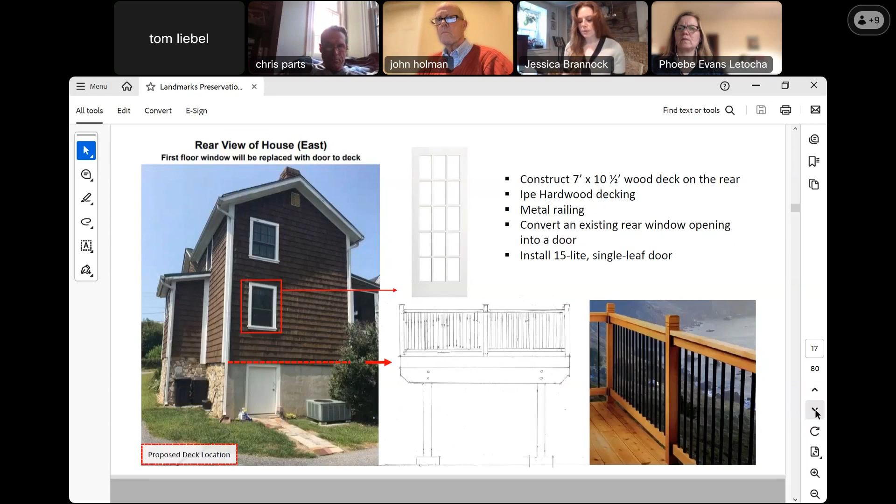Next we have the Hart property at 410 Fairmont Avenue in Towson, County Council District 6. This is final landmarks number 235, the Parker House, which was relocated from its original location in 2015. The applicants have proposed the construction of a rear 7 by 10.5 deck and to alter the existing rear window opening to convert it to a door, citing Baltimore County Historic Preservation Guidelines Chapter 2, Windows and Doors, and Chapter 7, Fences and Landscapes, County Code Section 32-7-405.

And lastly we have the Wheaton property at 207 West Seminary Avenue in Lutherville, County Council District 3. This is a contributing resource within the Lutherville County Historic District, and the applicants are seeking ex post facto review of a 42-inch Gothic-style spaced picket wood fence installation in the front yard. Note that the fence is partially constructed; the posts are in. Thank you, Phoebe.

We did receive 3 additional letters related to the fence proposal in Lutherville. Is there anyone present who wishes to speak against the approval of the items, or any members of the commission who wish to discuss any of the items before we vote or pull any off the consent agenda?

Hearing none, then I would entertain a motion to approve the consent agenda items as submitted. Move that we approve the consent agenda. Second.

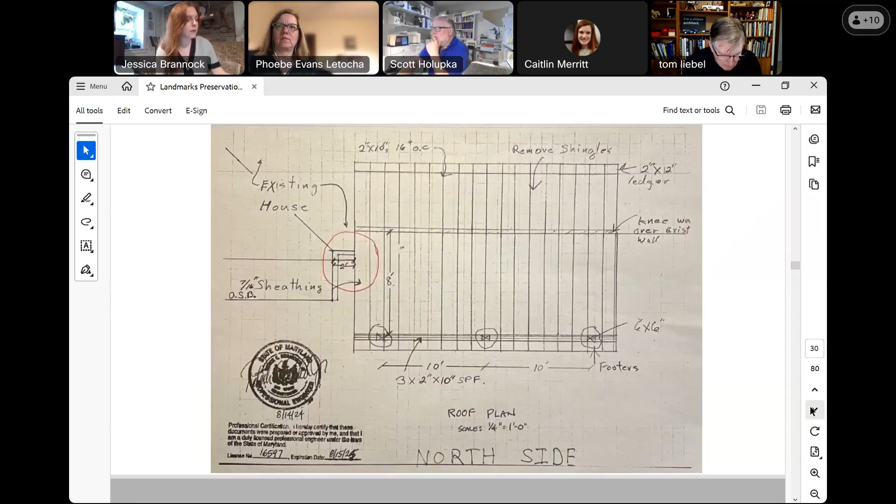At the February meeting, the commission voted not to approve the work as proposed and stated that accurate drawings showing the relationship between the proposed and existing roof lines with clear dimensions and materials be included in the resubmission. Additionally, the commission asked for an elevation drawing that shows the new roof's relationship with the existing house, and that the supports, rake, and fascia be wrapped with a vinyl or aluminum finish to be more cohesive with the dwelling.

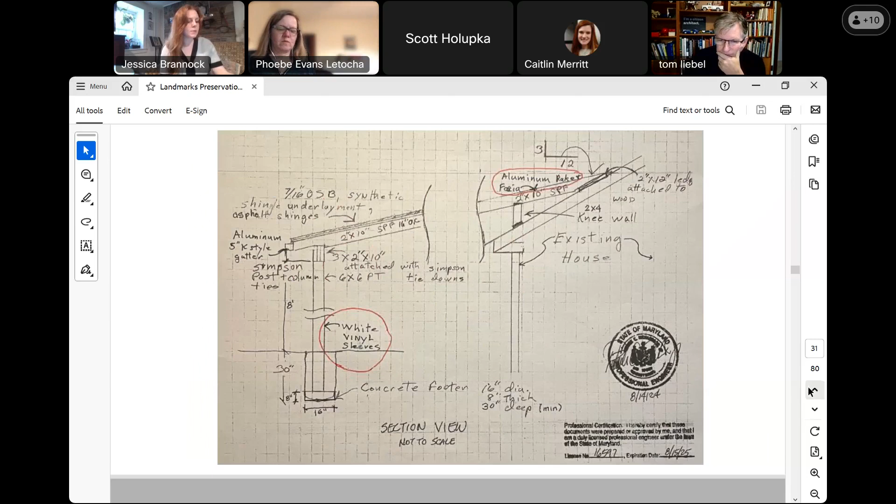The applicant has returned with updated drawings to identify the 2-foot gap between the proposed and existing cross gable roof lines and has labeled the plans to include aluminum finish on the rake and fascia and vinyl wrapping on the supports. An elevation drawing showing the relationship between the roof construction and existing rear elevation was also submitted. However, the drawings did not include dimensions.

Staff asked the commission to discuss and review the updated plans and determine if the proposal meets our design guidelines, then to approve, modify, or deny accordingly, citing Baltimore County Historic Design Guidelines, Chapter 6, New Construction, Additions, and Non-Contributing Resources, County Code, Section 32-7-405.

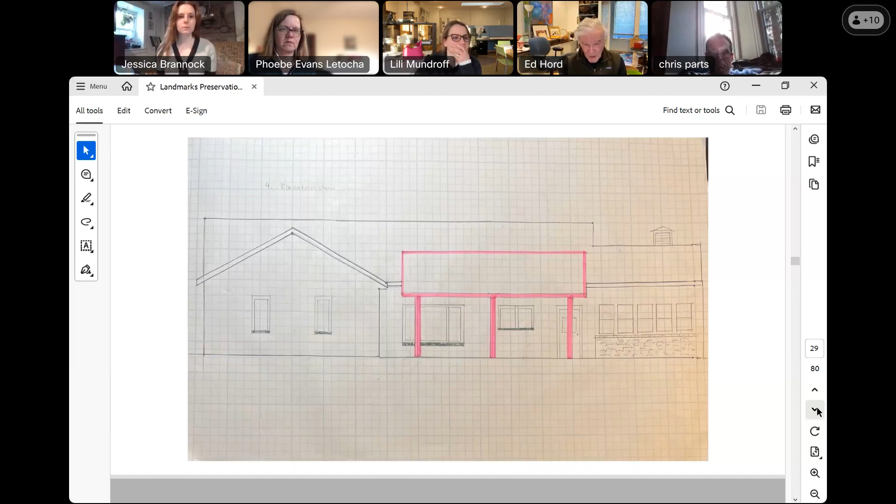Could you go to the section drawing? I have another question. We have, there's a gutter. First of all, a question for, I guess, the contractor slash engineer.

Are you keeping the roofing underneath, on the old roof underneath the shed roof? Are you taking the roofing off? The plan was to go over it. And so if water blows in, are you flashing over that little knee wall, the sill plate for the knee wall? Right, we will actually enclose that end, that will be blanked off, so there won't be water getting in behind there.

Okay, so that would be seen from Rolling Road then, conceivably. What about the gutter? Does the gutter run all the way through, or are you adding new downspouts and terminating the gutter when it goes under the roof? The plan was to terminate the gutter and run new downspouts. So you would need to show downspouts.

Yeah, I'm used to seeing drawings of how all this stuff's going to work, but I suppose it's fine. All right, I just want to define it.

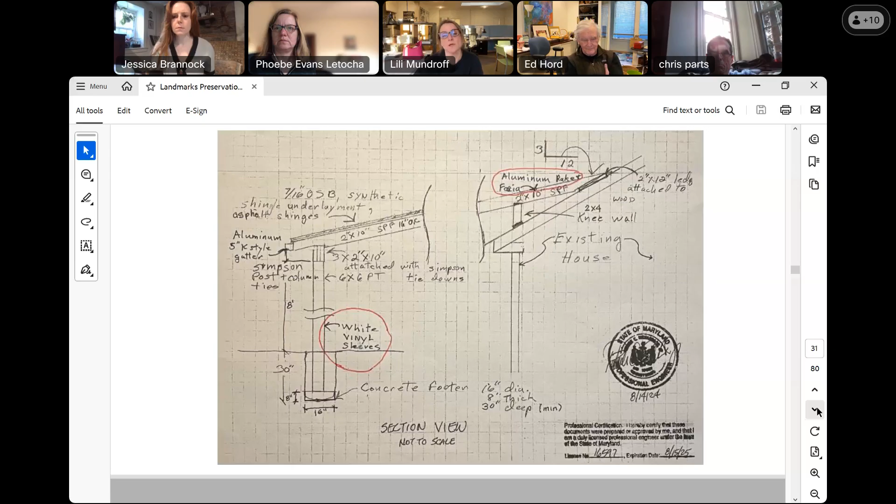It's not, to me, a rear roof addition, because Rolling Road is primary, not the—I mean, I understand the house address is on Francis, but Rolling Road is more prominent, so it's really a corner. It's not on the rear yard. So I don't know whether or not you're requiring an elevation as well on the Rolling Road side. And also as a consideration, by definition it's a corner lot, right? It's not a front-back scenario.

Okay. I mean, these are the most minimal drawings you could possibly do. It's structural—everything, you've got the structure, but nothing beyond structure is really shown except some red lines on sort of a back elevation. So I find it still not enough information to really evaluate, but I suppose I'll wait and see what other people say, see if anyone agrees or thinks anything else should be done.

Other commissioners who wish to speak to this? Phoebe, I'll just speak. I'm not sure that we're going to see anything more from a side elevation there than what we already know. I think the issue that was raised in the last meeting has, to my belief, been addressed, and I'm okay with it.

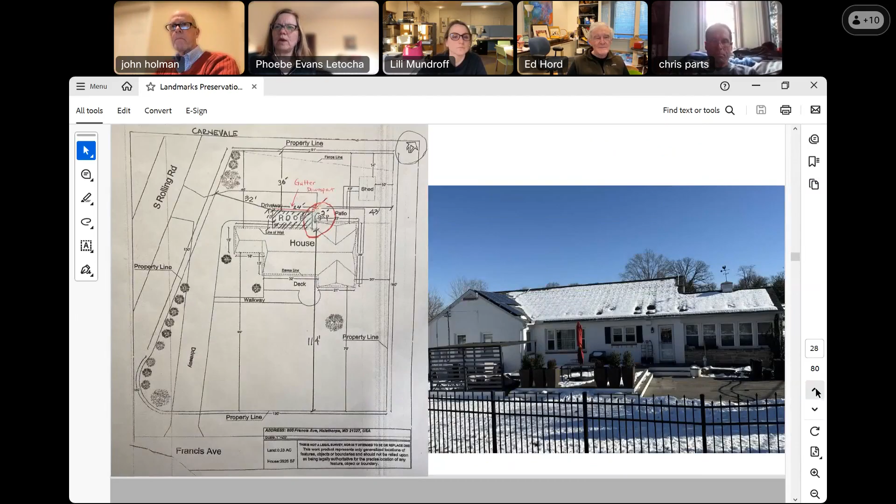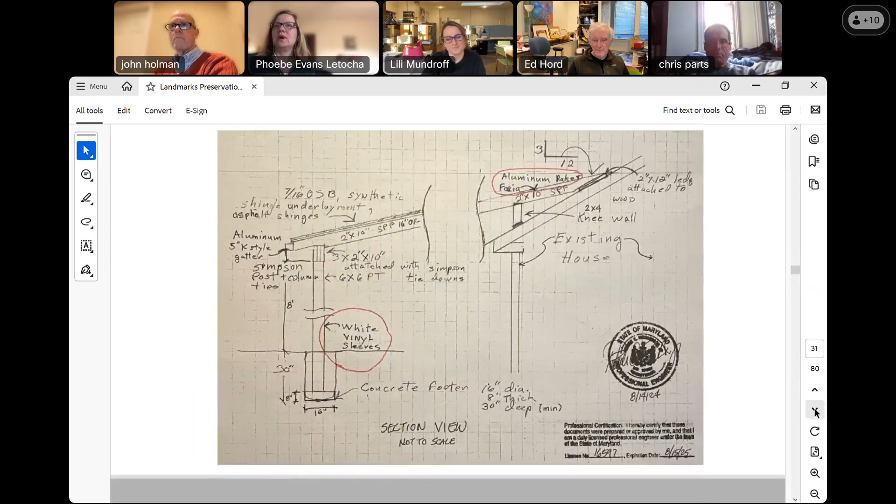Okay, so do we have a motion? That's my motion to approve it. Okay, so your motion is to recommend approval of the proposed roof addition.

Do we have a second? And are we able to, John, I'm wondering if you might be willing to amend just to suggest that the owner consider placement of the columns, but aside from that. Yeah, I'd be happy to have that amendment. I just had this vision of people streaming out that back door straight into that pole ever since you mentioned it, Chris. As an insurance guy, I get worries of my own on that.

So I would second that, then, as amended. So a movement of the columns to the very corners is what you're recommending. That's not a problem. Okay, so I guess we have a motion and a second, so we're ready for a roll call vote.

Roll call vote: Chris Parts, yes. Lili, no. Dan, yes. Wendy, yes. Chris Weston, yes. Ed, no. John, yes. Jamie, yes. Scott, yes. Ted, yes. Tom, yes.

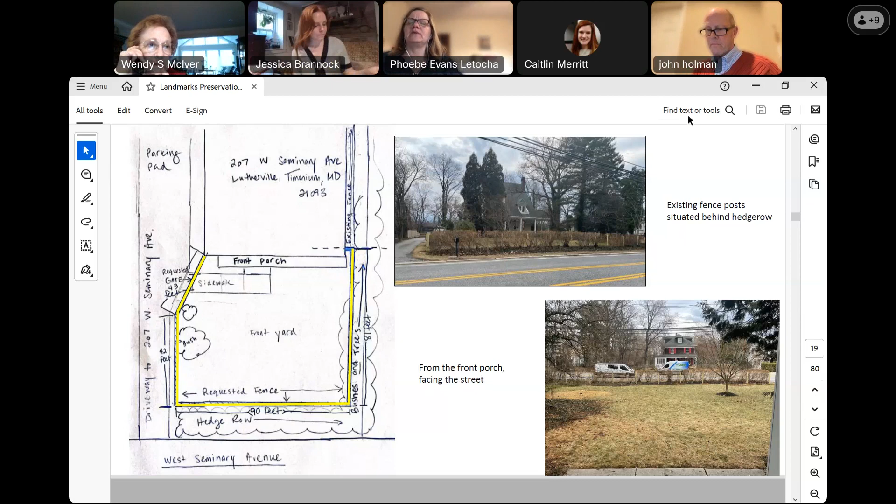Okay, and let's move along then to agenda item number 8, the Rogney House. Yes, thank you. The Rogney House is owned by the McGrigg LLC property at 14943 York Road in Sparks, County Council District number 3. This is final landmark number 367, the Rogney House or Brookvale, and includes multiple buildings and setting.

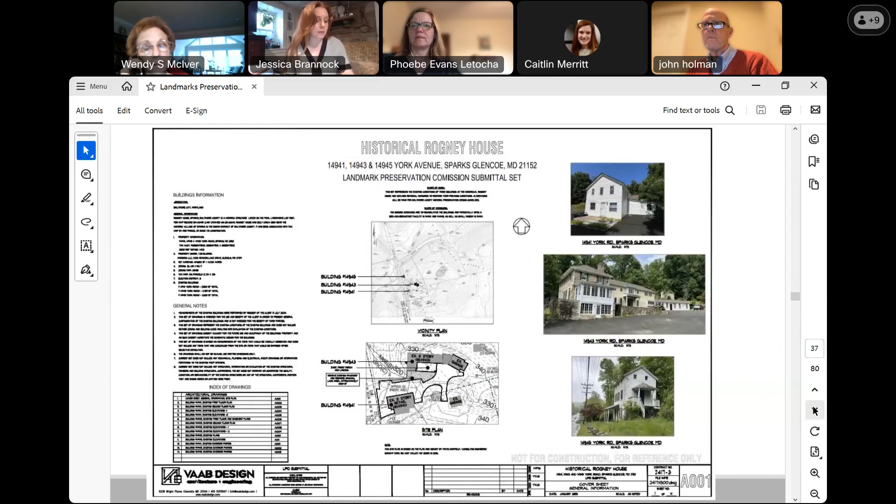The applicant has come before us to review various ex post facto exterior alterations to the properties at 14941 and 14943 York Road, including asphalt driveway, and proposed exterior alterations to 14945 York Road. This is code enforcement correction number CB 24-202. We have broken up the presentation for each of the properties, and it'll make sense as we proceed. The property is a circa 1830 two-story random rubble stone dwelling with a two-story frame L addition. The property was locally designated as Baltimore County Final Landmark number 367 through Council Bill number 86-10 in 2010.

The designation includes 7 historic outbuildings: a blacksmith shop, office, tenant house, sheds, spring house, stable, and an ice house.

In March 2024, a correction notice/stop work order was issued after a constituent complaint regarding the expansion of the existing asphalt driveway without LPC review or a building permit. The applicant has submitted multiple work items to address not only the current code violation, but also additional work done without approval or permits, as well as future work.

Staff worked to organize the work items by building to avoid confusion. The first concerns the driveway expansion, which is part of the correction notice. To resolve the code issues for the driveway expansion, the applicant is seeking an ex post facto review and approval of the present driveway conditions.

Where completed, work included new asphalt laid over existing paved areas. Some areas were expanded by paving over previously existing grass or flower beds to be flush with the buildings. Staff has concerns with water runoff or drainage against the foundation, and it appears asphalt has been laid over a previously existing stamped concrete patio area by the side entrance on the rear yellow addition of 14943, as well as removed low stone walls. The applicant has stated that they are also willing to return the driveway to its previous conditions.

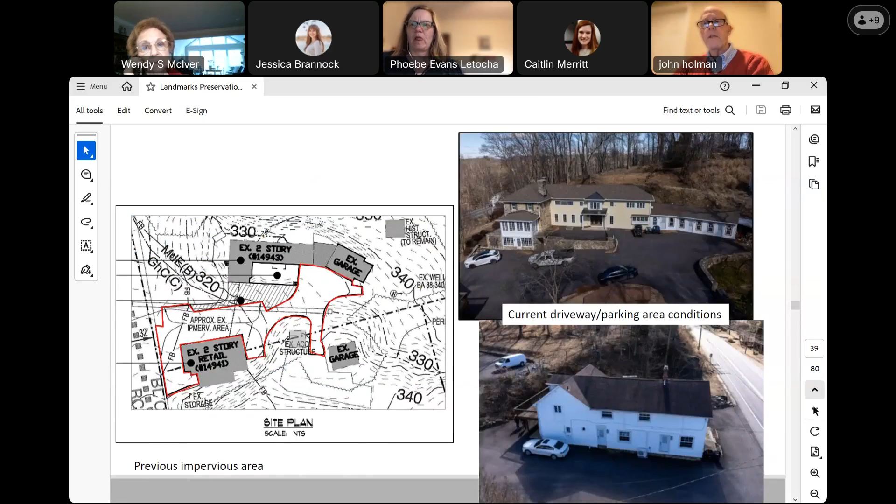Just to be clear, if we can go back to the slide we were just looking at -- so we are suggesting that he recreate those grass strips on all three of those buildings. Is that the idea?

I do want to chime in real quick. I'd prefer that we leave it as it is right now. If you guys do want that grass back, no problem, we'll try to work that out as well. But if possible, we can leave it as the picture below shows how the asphalt is -- that'd be wonderful, because it creates a bigger space. Looking at previous images from Google, this whole driveway area had been expanded over the past 20-30 years. If I went back to 2004 on Google Maps, I saw it literally had a small driveway going from the road to between the houses, and over the years it was asphalted. Honestly, we didn't really know about the historic requirements, or we would have never touched it.

Thank you. I have a question for you, Mr. Gregorian, is that your name? Yes, sorry. Wendy, how are you? I remember you precisely -- we met on a very rainy, ugly day. When you pulled up, you made it very sunny and beautiful. Oh, thank you. But if you recall, you were asking me questions, and I told you that you first needed to talk to Baltimore zoning because you did not seem to know what you were allowed to do with the property as far as zoning. And then I said you must talk to the LPC staff, because I wasn't sure how many of these buildings are landmarked, but I know some of them are, and you needed to talk to staff to find out what is landmarked and what you're allowed to do under those requirements. So you did know, because if nothing else, I told you.

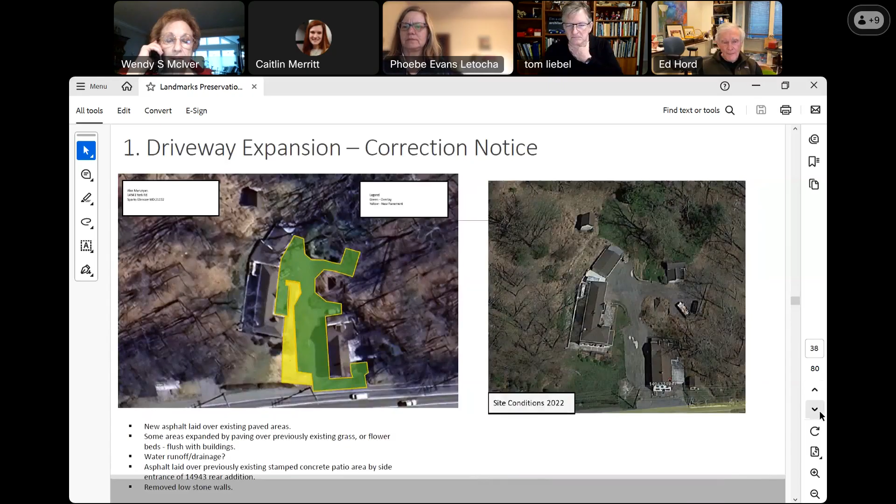I have one. The other thing is on that chart that showed where the green and the stuff was expanded. If you look to the little building, go back to that prior slide - there, if you look on the upper, that small building, there's a patch of impervious area between the building and the asphalt, which I think is appropriate. And there's a section in the back of some green and some paving on the right-hand picture. So there is more expanded asphalt than is shown on the diagram - it shows just on the building on the left.

I apologize, are you talking about where it says the antique sign, right by the White House? Yes. Actually, that's overgrown grass, so there was actually asphalt there already. Take a look, if you look on the other side, there's a patch in the front and the patch running along the side of the building. Oh yes, so the patch, we haven't touched that.

Yes, so that the front - you did touch it, it's paved over on the photograph below. On the side of the house, yes, but on the front, those two small green areas, we haven't touched it. It's just we need to do landscaping for that, to bring the green back. You did do it on the left side of the building. Go back - the left side, yes, correct. So yeah, that's my point.

Okay, so that's my point - it doesn't show. I think it ought to if it's going to go back. I think everything should go back to the way it was. And not have it go up against the buildings, you mean? Yes, to have a buffer.

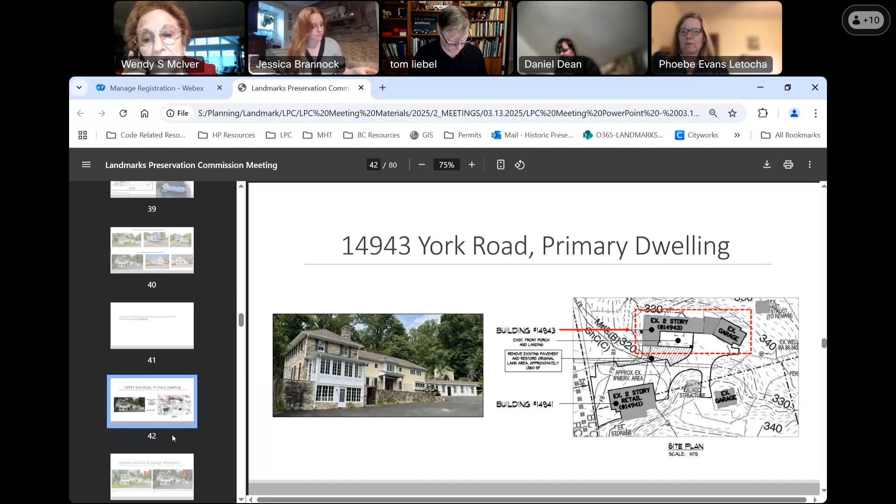Work completed to the primary dwelling without LPC approval or proper permits includes the following: an addition and garage alterations - an 18 by 5.5 foot trapezoidal hyphen was constructed by September 2023, connecting the east elevation of the rear frame L addition of 14943 to the detached garage at its rear.

The hyphen is clad in vinyl siding with a timberline asphalt shingle gable roof, one 6/6 window, one 1/1 window - although the drawings show two 6/6 windows - and one 3-panel entry door. Google imaging indicates exterior alterations to the previously detached 1980s garage were made sometime after September 2023. The previous garage had a single roll-up style garage door on the south elevation with a series of 4-panel transom windows with 6-light grids. The west elevation contained a single entry and a double-paned window with 2 transoms situated above each panel.

After September 2023, alterations to the garage included: the south elevation entry was enclosed, 2 new entry openings were created, and 2 3-panel doors were installed. The previous band of fixed windows on the front were enclosed, and 4 window openings with 6/6 double hung windows were installed. The west elevation was enclosed by the construction of the hyphen addition.

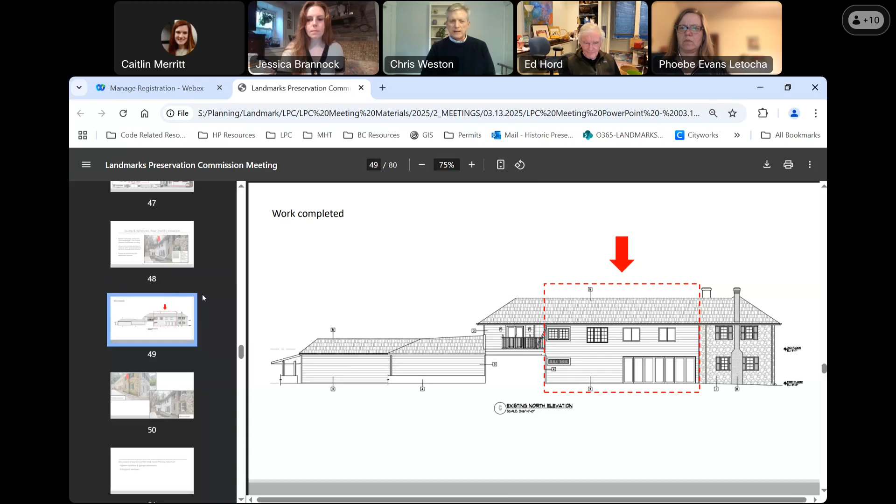I have a question. It seems like the connecting piece that's connecting the house to the garage was built without a permit. Maybe that's the bigger issue here, is that the scale of this building has been dramatically changed to something that looks like a motel almost. Yeah, it does look like a motel in its current configuration.

Exactly, that's what I was thinking. I saw cars and ATVs parked in front of it. I thought that's a motel. And also you have 3 doors. I think it's stated somewhere in the application that it's meant to be a bed and breakfast. It is like a motel, or something.

So just to clarify, the original 1980s garage was a non-contributing structure on the property, whereas the main dwelling is a landmarked property. So it's the same type of thing as if we were in any other county historic district, where any accessory construction would be reviewed by the commission. So any changes to this garage would have needed to come in, even though it is considered a non-contributing resource within the landmark designation.

I think, technically, if this connects to the main house... Excuse me, let's let John speak first, and then Ed. Just a point of clarification - if they attach it to the historic part, then it becomes ipso facto part of the historic building, right? So it's no longer a non-contributing part, it is part of the historic building, right?

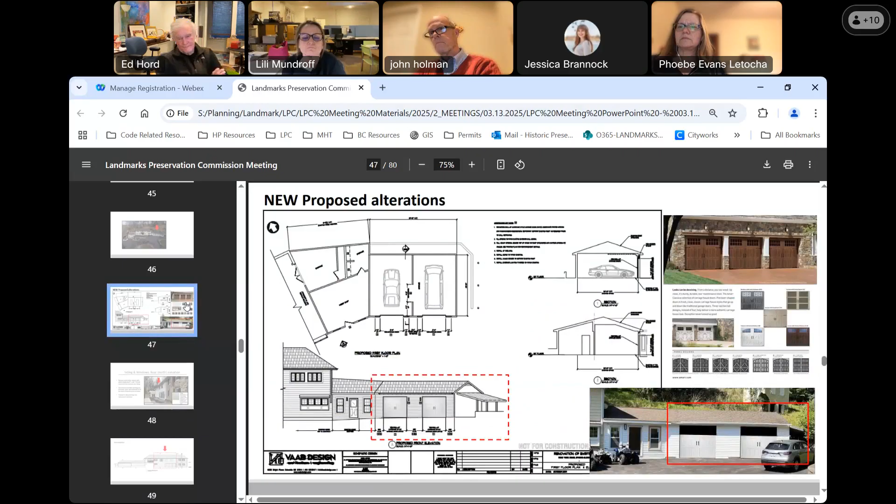The garage images that you guys saw that Jessica had pulled up on the blueprint, that's not what we submitted. That was the first submittal that we did, but we just want to keep it the way it is, and we'd like to install the proper siding to match the main house, the yellow siding.

Yeah, that's what it is for this front garage portion. I understand we didn't get approvals for this, but we see the use of it like this a little bit better. From the inside, it's not connected to the house. The only access is from the front entrance, and it's mostly going to be used basically as a shop, a storage room.

Also, I'd like to add in terms of the backyard area, the windows - this area where it was boarded up, we actually bought the place like that. The previous owner wanted to do a wedding hall, so he blocked all those windows off. So we installed these windows, and that's all it is. We just installed the new vinyl windows, and then put the vinyl siding. We didn't know about the situation.

I'm sorry, I'm just a little stressed out from this. That's fine. So we have a motion to deny the application for these parts. If we get a second and we vote to deny, you would have an opportunity to resubmit with clarified details about what you do want regarding the garage, the hyphen, the doors and windows, and the siding.

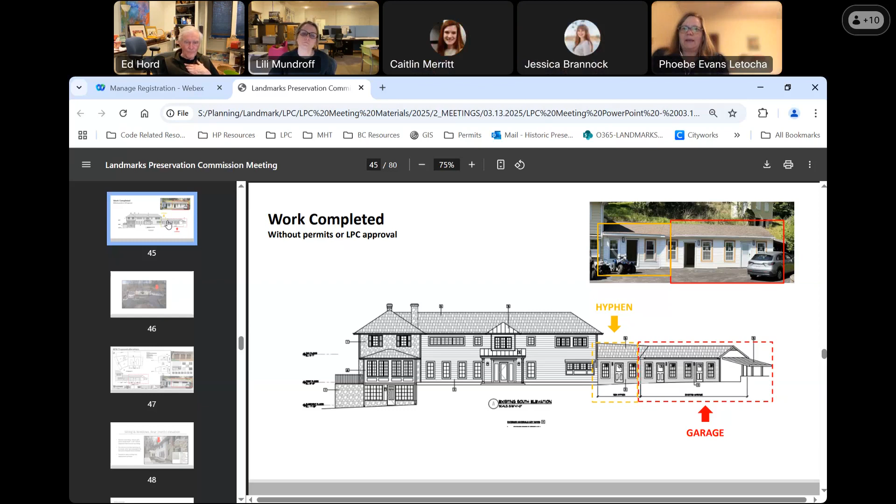All right, could we have Lili, please? Yes. Dan? Yes. Wendy? Yes. Chris Weston? Yes. Ed? Yes. John? Yes.

Okay, I think John's having some issues. Yes, John said yes. Okay, thank you, John. Sorry, I said it in my quiet little voice. Oh, thank you, John.

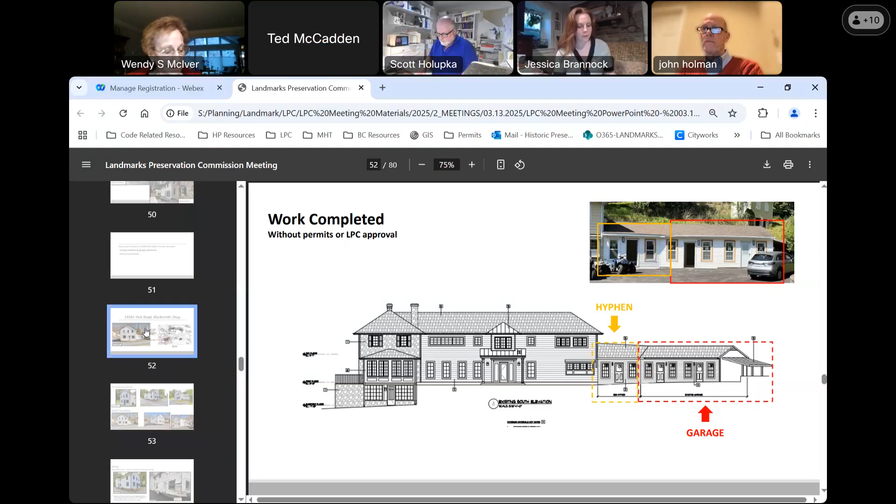Can we have Jamie, please? Yes. Scott? Yes. Ted? Yes. Tom? Yes. And Phoebe, please. Yes.

All right, moving forward to 14941 York Road, the blacksmith shop. Just give me one moment. So the property is a 2-story frame structure constructed in 1880.

The structure is clad in German wood siding with a 2-story 1910 rear addition and single-story side addition. Both 1910 additions are clad in board and batten siding.

Google imaging from 2018 through 2023 indicates that major exterior alterations were made to the primary structure without LPC review and proper permits. The work included covering the German wood siding on the primary structure and board and batten siding on the rear and side additions with vinyl siding.

Replacement of previously existing windows with vinyl. There was a set of 6/6 wood sashes and 4-pane wood picture windows on the front elevation, and 6/6 wood sashes and 4/4 wood sashes on the north side elevation.

Alterations to the window and door openings on the front elevation, which is the west side, include: a second floor window opening made smaller, shown on the upper left side; altering the window style on the first floor from a 4-pane picture window to a larger 6/6 style; and a door replacement.

On the side or north elevation, we have the enclosure of window openings on the second story, the creation of new window openings on the second story, altering window sizes on the second story, and adding a door opening that previously existed and was enclosed under prior ownership.

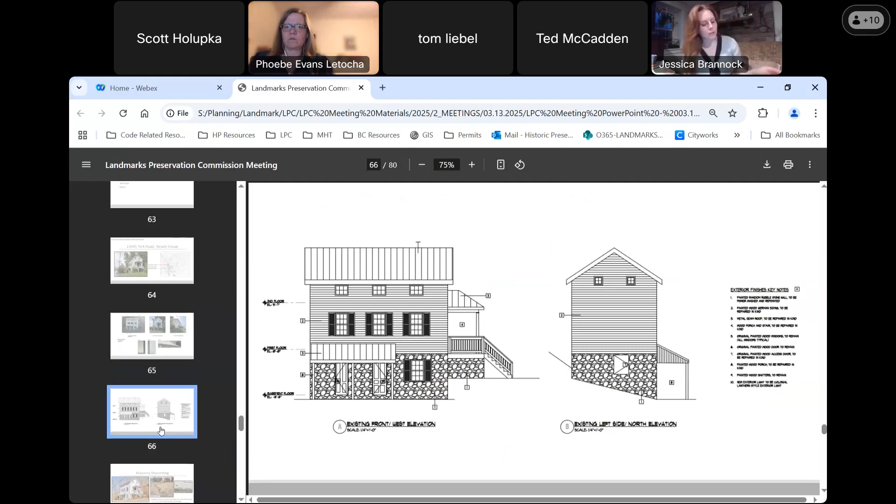The work proposed for the tenant house includes the following: masonry repointing. The application cites major damage to the stone masonry of the dwelling, porch, and retaining wall, and has proposed to wash and repoint the features as necessary. No information was provided on the repair techniques or mortar composition. For the standing seam roof repair, the applicant cites a missing sheet on the side gable roof of the primary structure and has proposed an in-kind repair.

No information was provided on the proposed material or the condition of the standing seam shed and gable roofs. Staff asks that the commission clarify the material with the applicant and whether the other two roofs will be repaired or replaced as well.

For the porch reconstruction, the applicant proposes to dismantle, repair, and construct the existing porch and steps on the south elevation. No additional information about the condition was included, although the drawings mention that the porch will be repaired instead of replaced.

For the window and door repairs, the application mentioned repairs and possible replacements to the existing windows and doors as needed. No conditions assessment of the windows or doors was submitted, and no information on the proposed repairs was provided.

Additionally, the application notes that new exterior light fixtures were installed where no lights previously existed. The fixtures installed are simple modern LED lights, and staff has no issues with adding lights of this style or fixture. Thank you.

In the interest of time, it sounds like there's a lot of additional missing information. So Mr. Gregorian, if you could be brief in your comments. And sure, I will unmute. Alrighty, Mr. Gregorian, you're unmuted.

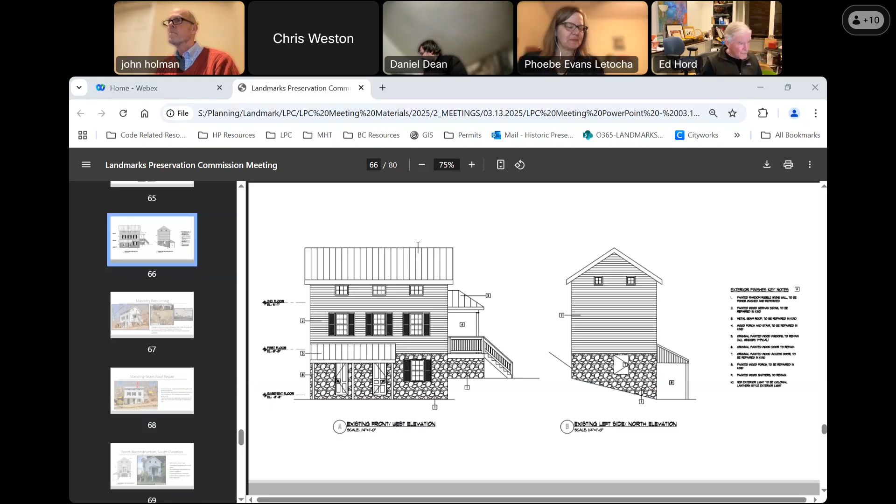To Ed's point, when I was speaking with him in the applicant's initial preliminary remarks when we were discussing this building, there was a lot of 'I think, I'm not sure, I'd like to do this, I'd like to do that.' So I assume these drawings were not a fully thought through idea. We don't have detail on what kind of mortar and other information, but this one is relatively good because he's leaving everything and he hasn't messed it up. I think this one is closer, but maybe it makes sense to come back with everything, explain it, and have it at this level of detail compared to existing. So we have a motion to deny the application and encourage the applicant to come back with more detail, and more definitive detail about what he wants to do.

Do we have a second? I second. Thank you, Dan. And just to clarify, does the motion include the repair to the roof with the missing panel? Yes, John? I accept that amendment. Dan, that's part of your second? Yep. Sounds good. Great, thank you.

Can we have a roll call vote, please? Yes. Okay, and Dan? Yes. Wendy? Yes. Chris? Yes. Ed? Yes.

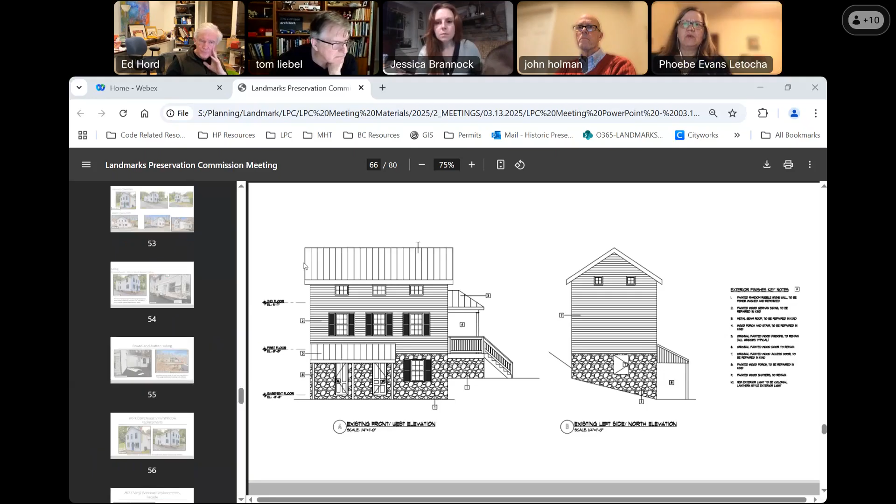Okay, so staff, moving on to our next part of the agenda. I believe that is the historic review applications for historic property tax credit that were approved by staff. If you could inform us of that.

We just had two properties come in with approval by the Maryland Historical Trust. The first is the Miller property at 100 Fairfield Drive in Catonsville. This is a contributing resource within the Central Catonsville and Summit Park National Register Historic District. The applicants received Part 2 approval for the installation of a new AC system and heat pump, as well as rehabilitation efforts to the sunroom. This is in County Council District number 1.

And then we had the Hoser Lock property at 722 Howard Road in Pikesville. This was a contributing resource within the Sudbrook Park County Historic District, and they received Part 2 conditional approval for a water heater replacement, chimney repairs, front porch slate roof repairs, and replacements to the main house gutter system, as well as exterior painting and a radiator valve replacement. This was in County Council District number 2.